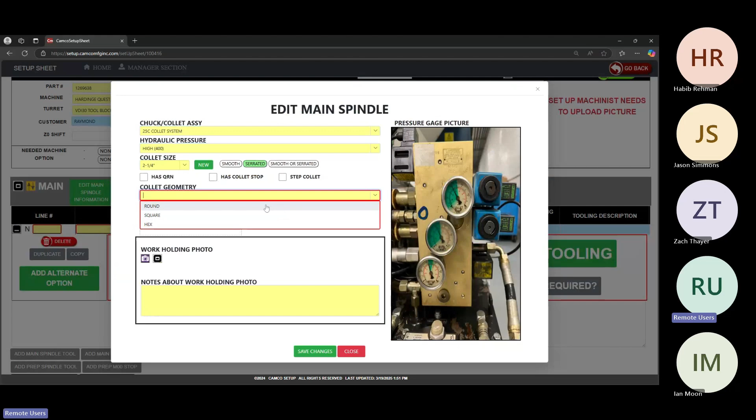And I want this to be serrated. So I'll select my serrated option, and I'm going to want a round collet. And from there, I can save the changes, and it saves up here. And that'll also be viewable on the printable copy, which we'll get to once I wrap up the sheet.

But the first thing I do is we're going to do a bump. So after I select bump, I have the system automatically recognize what the bump means in the operation description, so I can then set my bump size to what I need it to be. And to do the bump, we usually just use the face of one of our tool blocks, or we'll put a piece of copper or something in there if needed.

But we just use the tool block to bump the bar stock into place, and then it doesn't require a tool holder or tooling. So I'm just going to select those off, and then I'd move on to my first tool. So first tool would be roughing. One of the cool things that we've implemented is like a dictionary. So I'm going to do a rough

face and turn. And we kind of like a little bit of consistency with our setups. So as you see with the rough and the face, I type those in, but we have it auto change to the abbreviations that we found works best for us. So all of our setup sheets kind of read the same, and it's easier for people to understand.

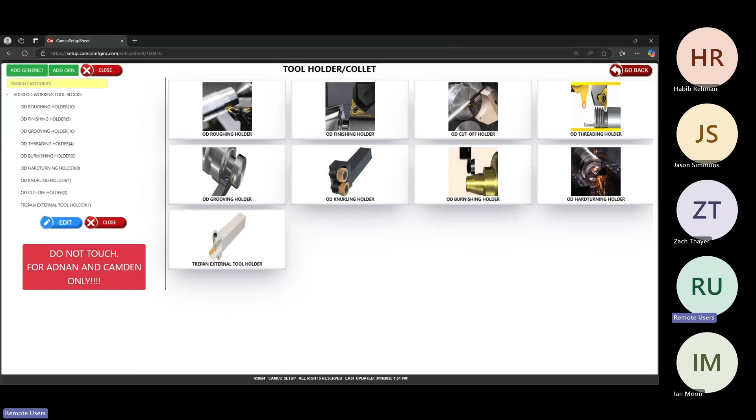So I'm going to go to OD roughing. And it just shows me the 3/4 tools that fit into this tool block. So I'm going to choose the left hand. And then going into the insert for the tooling for the tool holder, I select that. And then these are all the inserts that can fit inside of that toolbar. So then I can go ahead and select my insert.

As you see, we have usage pasted onto them. So some of the newer guys or the people setting up, if they don't know what to use, they can see what some of the higher used tooling is. So that's the number of places that's used? Yeah, that's the amount of times it's used in the setup app for that. That's how many times it's used in sheets.

So we have sheets where that QRN is being called out or tooling is called out, 1,065 times. I actually believe we have almost 2,000 setup sheets saved in this system here already.

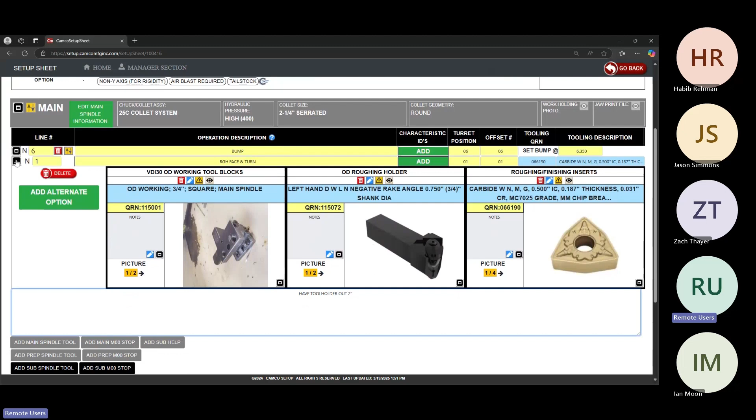And also we like our notes because they can tell us specific things either on individual N lines or we have overall sheet notes. So for this one specifically, maybe I just say to have tool holder out 2 inches, just some generic note helping the setup guy set up, and that'll come into play later during the printed section. But right here, I'd be done with this tool. I would go ahead and I'd move on to finishing.

Jason, can I pause and put you on the spot? This is all above my head. So is this making sense to you? Yeah, I mean, it's a little overwhelming, but it's just the steps through it all that seem like a lot, but it's super thorough. Yep. Gotcha. And yeah, that's one thing, it seems a little overwhelming, but we've found that some of our guys actually prefer a lot of this information when they're setting up. Yeah, I could definitely see that, versus just having a sheet of paper.

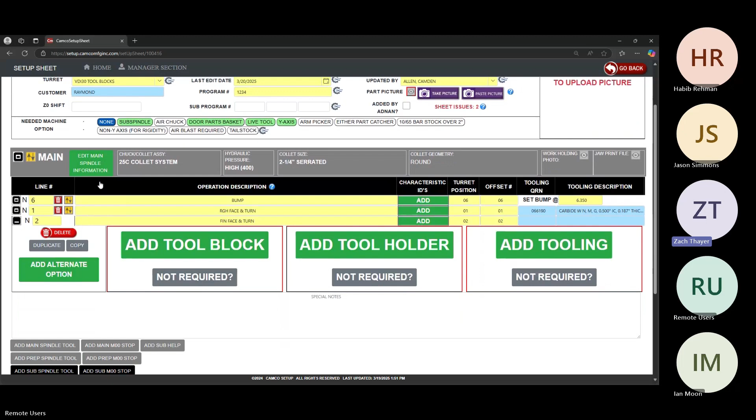Right. So the big thing is the initial setup: you've got to add tooling and how it all corresponds to each other. This stuff works for 3/4 inch, but how much is there of an existing library of tools that may work across systems, or is it all proprietary to each machine shop? I would assume that we would have to put our information in there for tools and inserts and stuff. Is that correct? I would assume so. I don't know what machines you guys are working with, but obviously some are going to have different tool blocks that receive different tool holders and stuff.

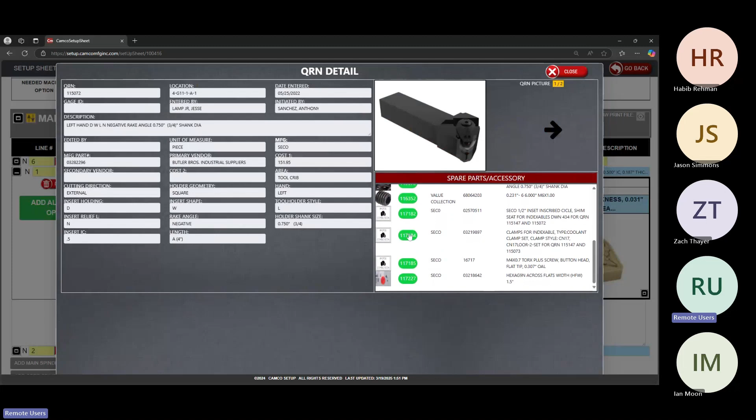Yeah, I just wasn't sure if there was a general library to pick from when we're building that out, or if the pictures that you have in there were all pictures that you guys added. Yeah, so we also use the tool crib. We like to know a lot about our tools. So here for the OD roughing holder, there's a lot of parts in the tool. So we actually have all of the set screws and shims and clamps and stuff all linked through the tool crib with the pictures.

I know Ian talked about, you guys were really looking at the setup app. But that's where the discussion started. And did I hear correctly, was it Camco Manufacturing? Yes, yep. Okay. When I went to your website, right off the bat I see an impeller on there, which is pretty cool, just the multi-axis. Our impellers are not that complex, but it's interesting to see the first thing on the page is an impeller. So anyway, that's more of an aside.

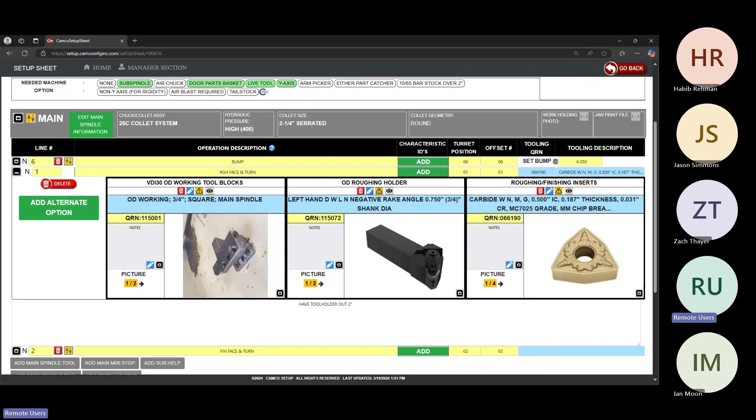I see you guys have a lot of machines, so I gather that's where you're really trying to keep things organized. Yep, and like you said, we have a couple different types of machines, so that's why this works great for us, because we're able to kind of cascade down, and we don't have our setup guys looking through the hundreds of different tools that they could possibly use but might not work with the machine or blocks that they're working on currently. So it definitely reduces the amount of information that they have to look through to create a good setup sheet.

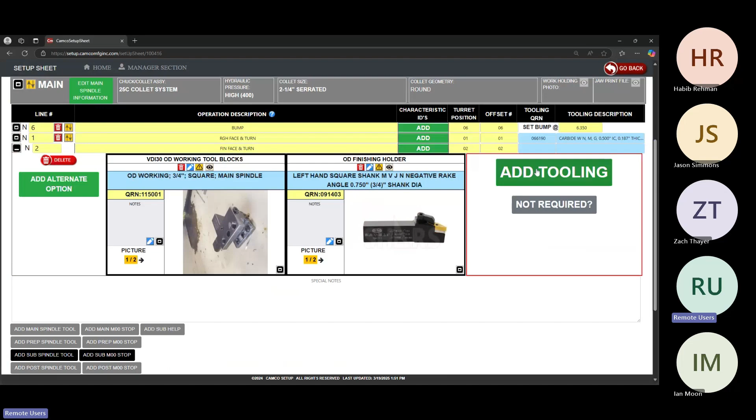But with the finisher, it's pretty much the same. I'll use the left-hand tool block. I'll go in here, and instead of going to the roughing, I'll go over to the finisher, and it works the same way. I'll select my 3/4 finisher, and then go to the inserts. And again, it'll just show the inserts that fit into this tool now.

One of the cool things is, let's say maybe you get a new custom tool in that possibly isn't in whatever system that's holding your information, and you can just add. So maybe I just say, new tool, and then maybe I just put the manufacturing number if I know that, just so later on it can get updated. So I see a camera icon there too.

Yeah. Yep, I'm actually on my personal PC, so I don't have a camera attached right now, but we have it. So our guys would have to take a picture of the tool, so we have a little bit more information about it, and it's not just whatever they write here for the notes. So I won't be able to save it. But do they use a tablet or a phone, or how does that work?

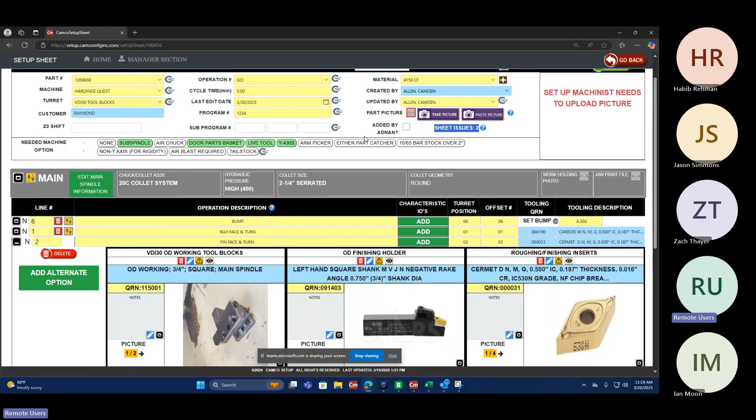Yeah. That's what Camco has done to really bring our setup sheets to be more uniform, and anybody can pick them up and use them just like they would their own setup sheet. We put a lot of locks in place to where they have to complete the setup sheet thoroughly. You can even see here I have a little sheet issue counter up here that tells me how many places information isn't filled out in the sheet, and one of them being the part picture.

But yeah, that's what we like to do, is limit what information they have to put in before they can save the setup sheet. That way, all of the information is being captured and utilized correctly.

So is there a lot of legwork that goes into preparing this specific to your shop, like the tools that are available for the guys? So when they're making a new sheet, they're just picking from options that are set up within your shop? If we have a new turning tool that goes out to a machine that's a different configuration, is that something that an app manager on site would put in there for the guys to select from, or do you have them enter new stuff in? Do you understand my question? Yep, I understand your question.

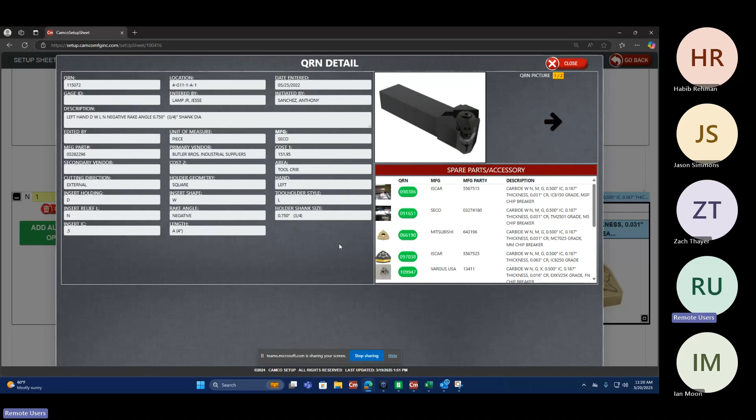I'm not sure exactly how your guys' tooling is going to be held or stored, but if new tooling comes in, we have our tool crib handle that type of stuff. But it really just depends on what information you want from the tooling. So who enters that data into tool crib then? We have data entry people. We give them the manufacturer and the manufacturer part number, and they go to the vendor's website and pull all of the information that we want for that tool and enter it for us.

And Ian, is this a picture from Tool Crib or is this still in the setup sheet? This is a picture from the tool crib. Like I said before, Camco Manufacturing has the tool crib and the setup sheet, and that's kind of unique to them because they have a dedicated tool crib with attendants that, like Camden mentioned, pull this information and put it in. You guys would have a slightly more stripped down version, because the tool crib has things like Kanbaning and other managerial stuff that you aren't really looking for. So you would have a screen similar to this where you would add the tooling information, but it would just be this information here. Okay.

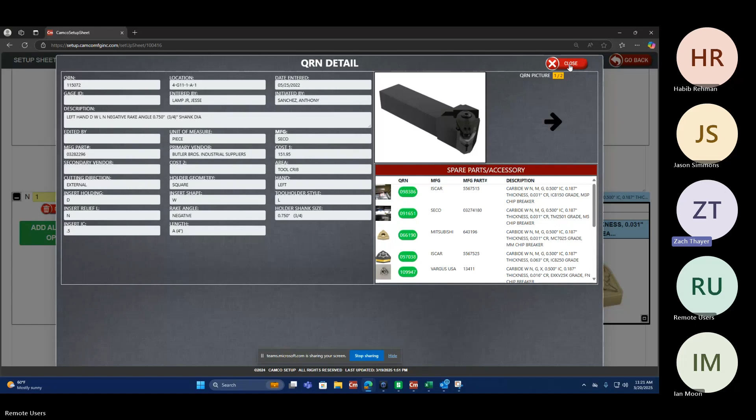And then going back to the workstations, did you say there's a camera at those workstations, or how do they get the picture in there? Yes, we have just small USB cameras that we have go around to each workstation. We've just modified them to have a magnetic base on them, so the operators can stick it to pretty much anywhere in the machine to take photos.

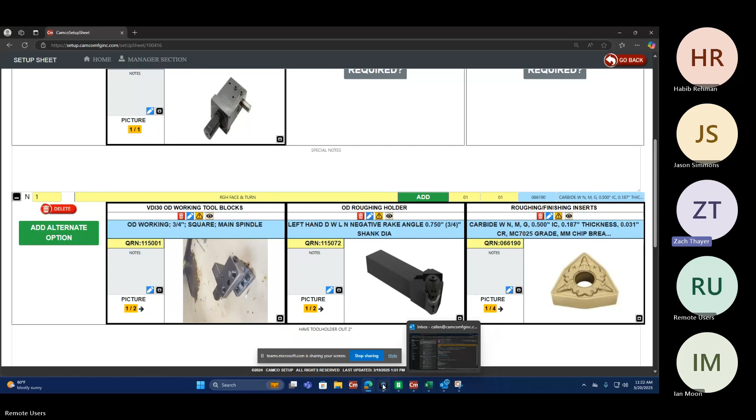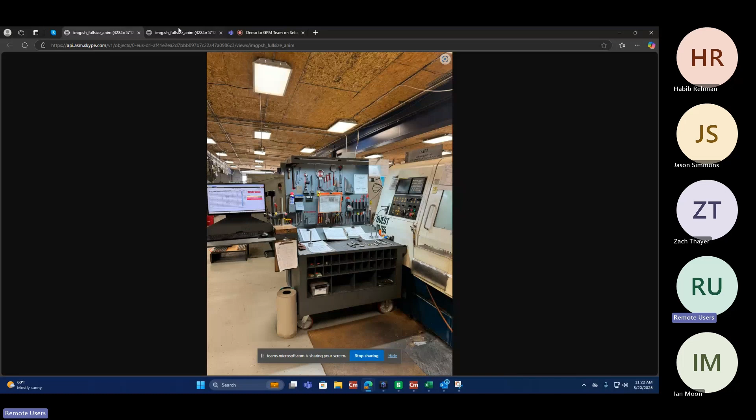Gotcha. So this is our mobile setup. We're moving into more of a stationary setup. So this is one of our finished workbenches we've been working on, and we're actually gonna, because of the app, stick a computer on every single machine. So that way, there's no more moving around computers and stuff. But I just kind of wanted to show you the two ways we use the app at the machines. We have some where it's stationary, but other than that, we have these mobile computers.

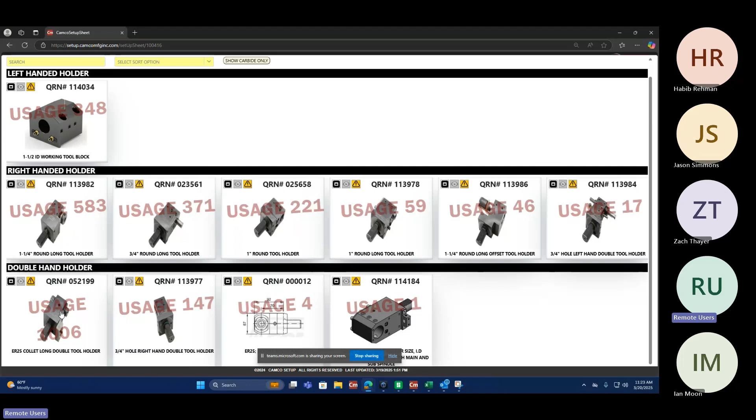Yeah. And I'll just show you quickly, if we wanted to add a drill or something. So I would select one of the live tooling blocks, or for this one, because I'm in a lathe, I can just select an ID tool holder that accepts ER25 collets. And since I select that tool, now for tool holders, I get the option to select the ER25 collets. And then I can go in and I can select the drill I want.

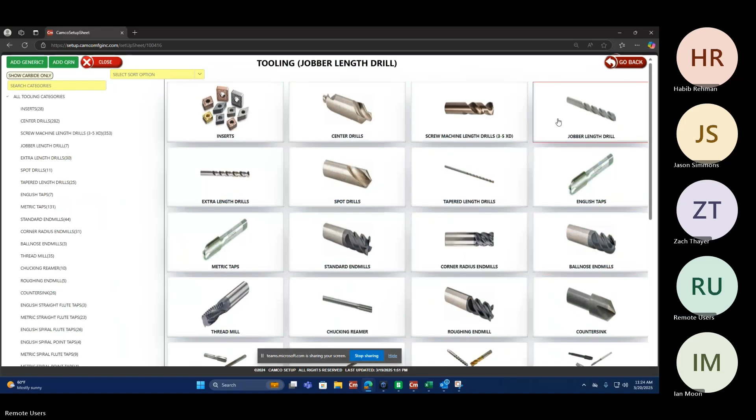We also, I'm not sure if you guys are familiar with M00 stops. They're pretty much just mandatory stops in the machines, so we can check certain things. So maybe I want to enter an M00 stop to just check the OD or check the ID. Special notes: make sure there's no taper. And then we can do some sort of transfer to subspindle.

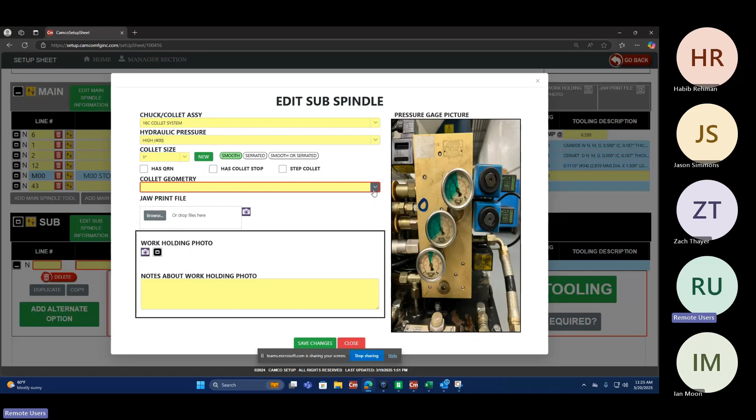And then from there, the subspindle works pretty much the same way. We have all new subspindle information we can put on there depending on what collet you would need to grab whatever finished OD on the machine. And you can put all that information there too. Want it to be high again, and maybe we're going down to an inch. And I want it to be a smooth collet now because it's going to be a finished surface. So now my subspindle has all of its information, and maybe I'm just roughing that side and turning it.

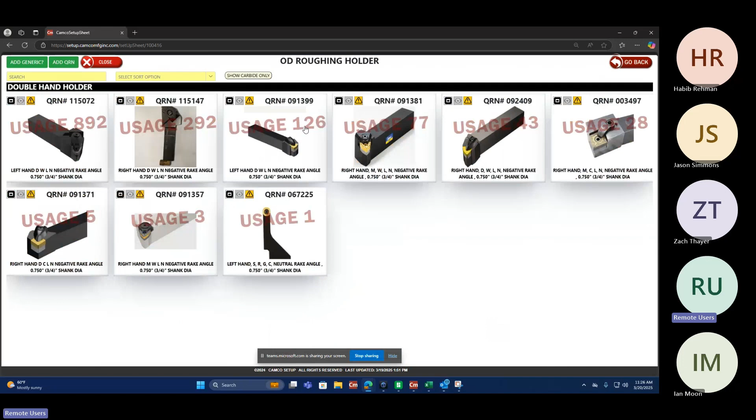I'm sure you see all of these red little lines around the cells. This is what I was talking about: we want everything to be filled out, so we make it visual for the guys on the floor to know what they haven't filled out yet. Just something small. And still using a VDI, but now I'm going to need a subspindle tool block. I'm still going to use a rougher, but I want to make sure I'm using my right hand. And then again, anything that's linked to that tool holder, I just pull the inserts. Maybe I select the wrong insert. I just select change and I can go to a different one and it populates it there.

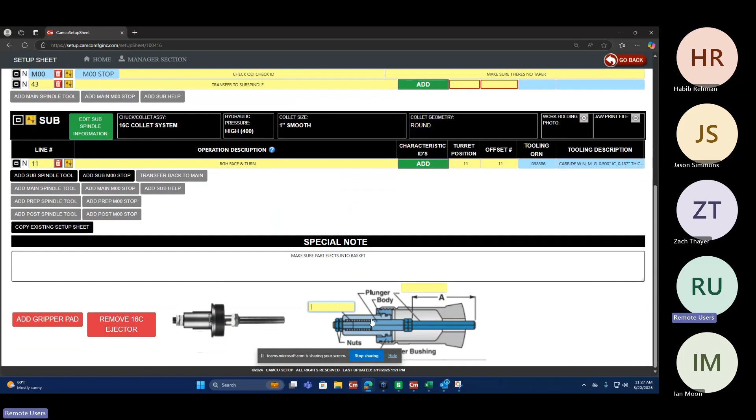Special note: make sure part ejects into basket. I'll add my part ejector here, and then I would just put the numbers of the tools that would be specific for this ejector job. These are the QRN numbers that I've been referencing. That's how we keep track of our tools by a number base in the tool crib, but that's what I would do for the ejector here. And then once I'm finished, I'll just save the setup sheet. The sheet's saved, and as you see it populated right up here into our 25 most recent.

I'm gonna go into the view now. And in the view, I can't edit. So if someone's just using the sheet to set up and they're not gonna have to make any changes, or want to print out the sheet, they'll go into view. And from here, I can print the sheet. We have a detailed setup sheet where it pretty much lists out each individual N line as its entire sheet, but the main one we use is just a 1-page printed sheet, and it takes all that information we entered and it makes a nice PDF copy.